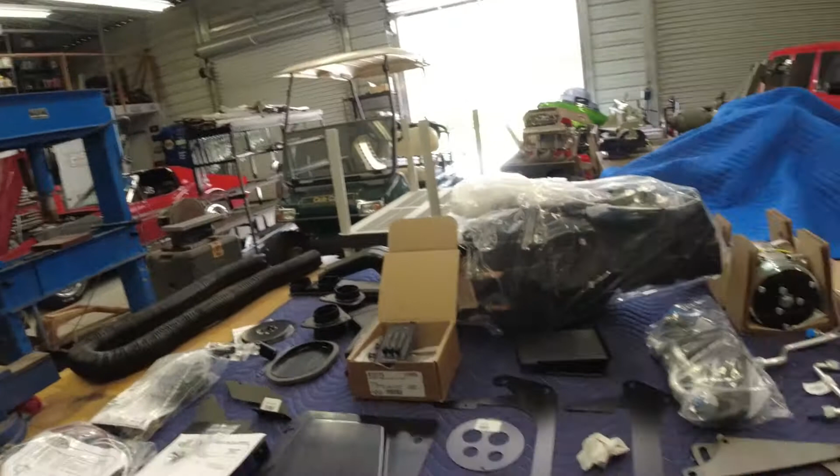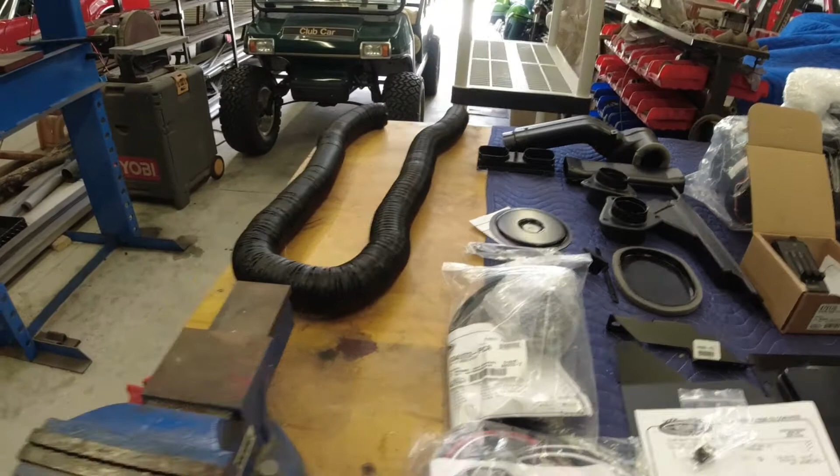But for now, I'm just going to show you a quick overview of all the parts here. It came in 3 separate boxes, and you can see there's quite a few parts. I'll say one thing for Vintage Air, they do a very good job of labeling everything and explaining everything, so there's no question where everything goes. If you look in each bag, they've got a parts list that tells you what's in each bag.

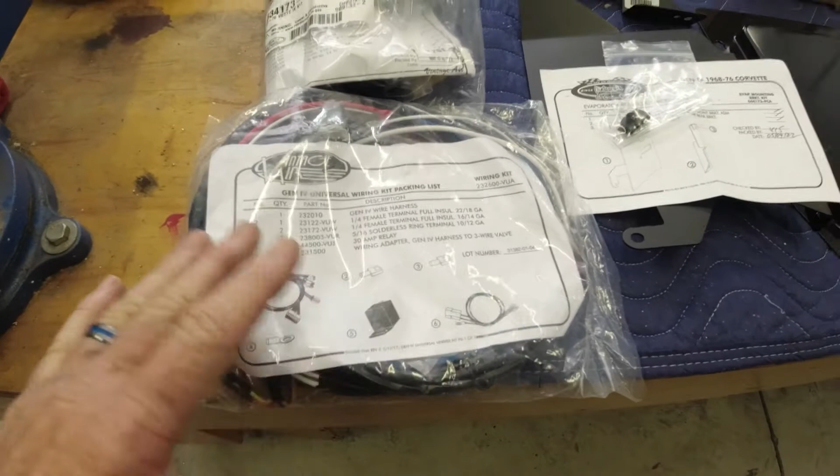This is a universal wiring kit, a Gen 4, that's the order of the Gen 4 unit, and it's for a 68 to 76 Corvette. You can see there's relays and wire loom and everything already in here. There's a little bag that says miscellaneous parts. So they got everything pretty much labeled.

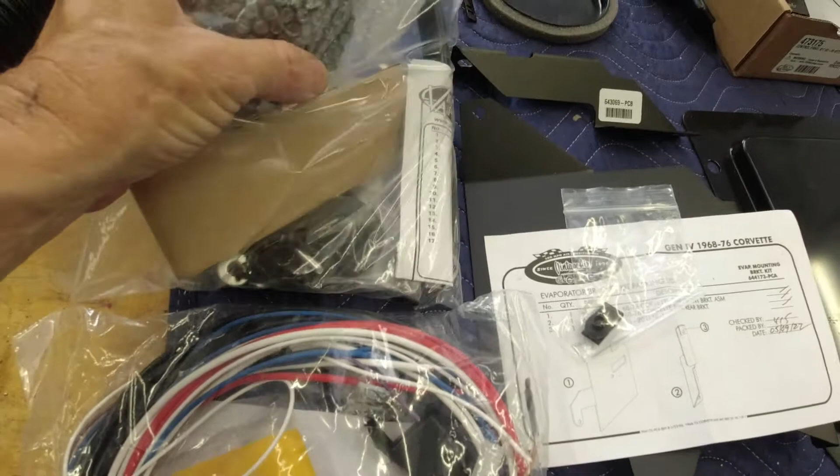Here's some hoses. I think that's the drain hose for the condensation out of the evaporator in the dash, so it drains out under the car, not on your floorboard. And then there's a switch in here for the heater core, which turns the hot water flow off and on in the heater core.

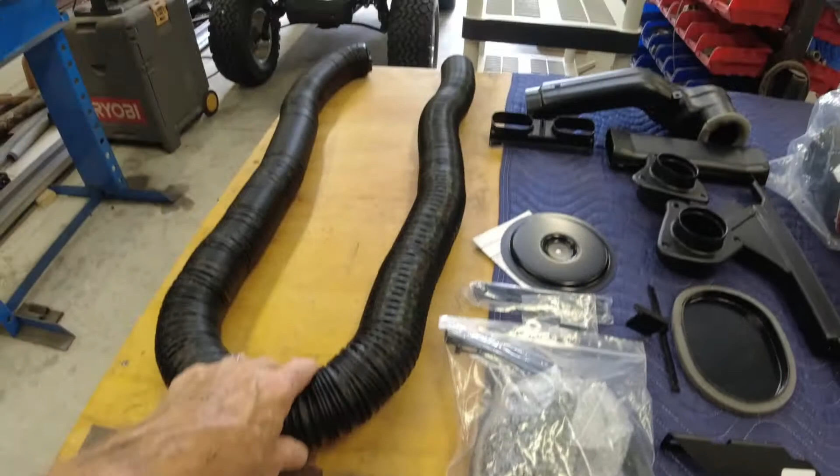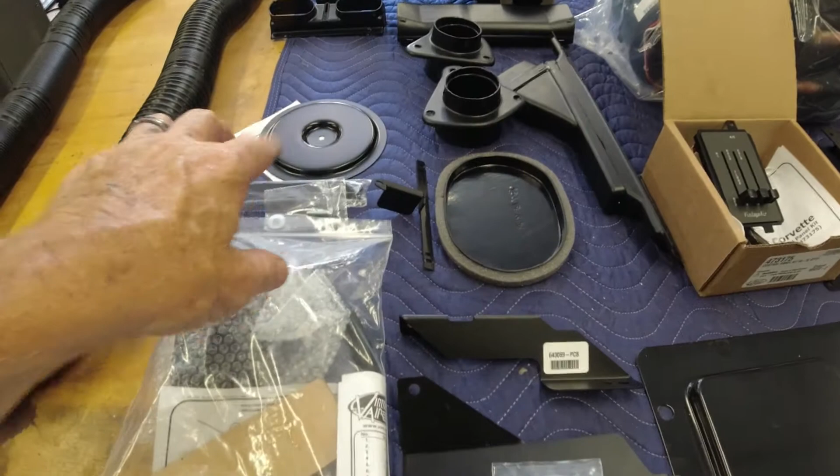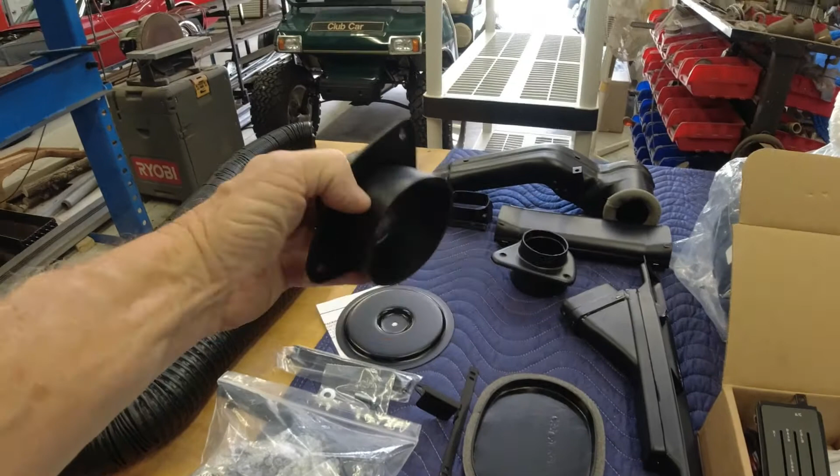You've got a hose here, I think it's like 10 foot long, but you have to cut it into certain sections. They give you the lengths to cut it to for all the different ductwork, and they give you new ductwork in the plastic parts that hook that hose to it, because the factory ductwork won't work with this system. Even the little round louver balls underneath the dash on each side, these parts go in place of those on the back, and the hose hooks into it, and this holds it on there.

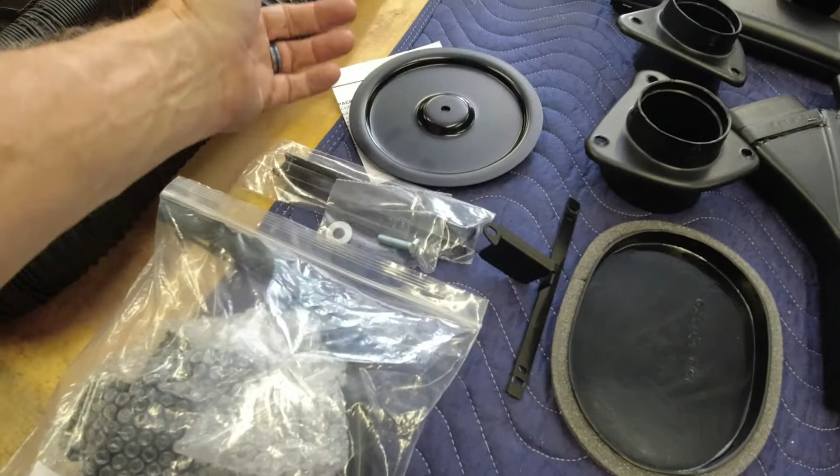I had to make a plate for my blower motor hole in the firewall when I got the car done, because I wanted to drive it. I didn't want a hole there, so I fabricated a plate and put a lip on it, made out of aluminum, and it works okay. But I think I'm going to take it out and put in this one they supply - it's a steel one with a back piece that holds it in the hole, and you're supposed to put silicone around it when you put it in. It fits good and everything, so I'm probably going to take that out and replace that.

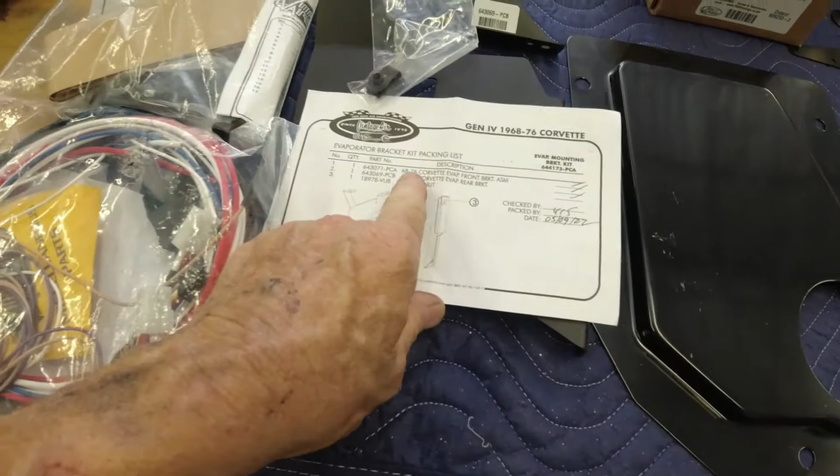Different brackets here, and again, it comes with packing lists in each bag. All this stuff was in separate bags like this - I took it out just so it's easier to see.

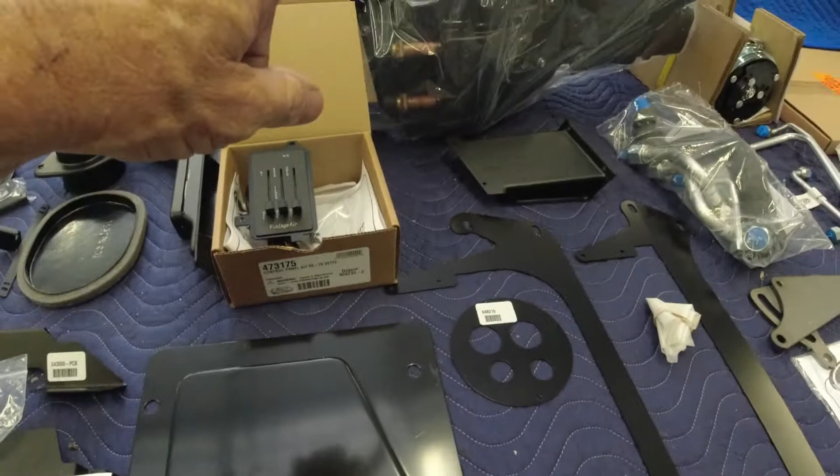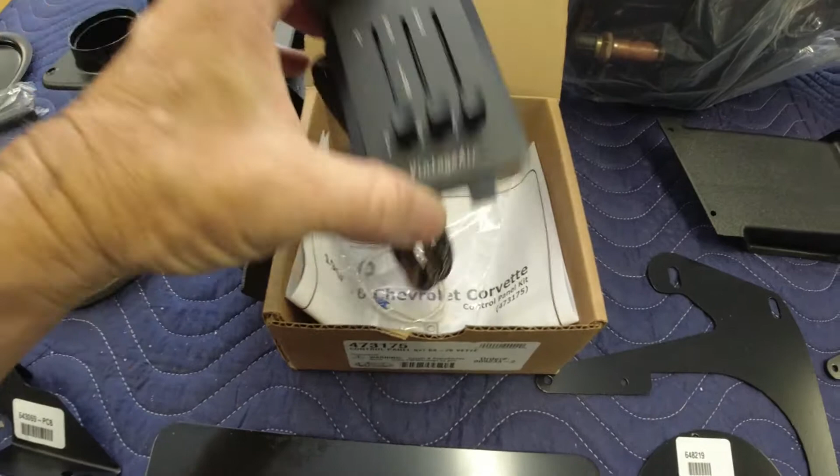This plate goes in the firewall between the air box and the firewall. You can use this with your factory controls, but I went ahead and got one with the Vintage Air controls, and this is going to fit perfect in place of where the old controls were, and it's going to be all brand new. It's going to be a lot simpler to operate instead of those turn wheels on the factory ones. I think it's going to look just fine. And then of course you get the air box here.

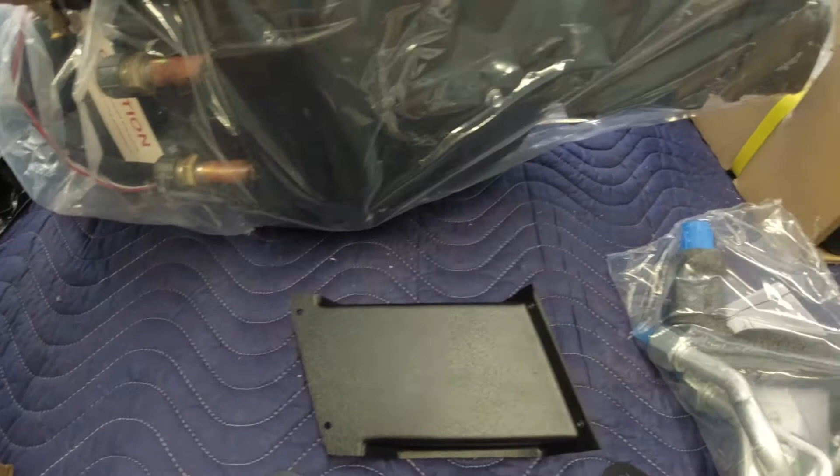It's pretty much self-contained. There's nothing really sticking out on the firewall side like the old original unit did. There was a big box on the outside, I think, where the heater core was, the blower motor and all that. Everything's self-contained, and it's all under the dash. It's a really nice unit.

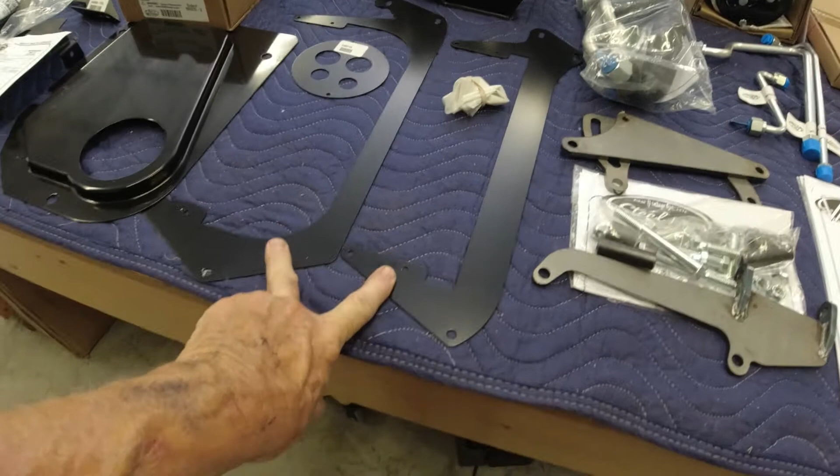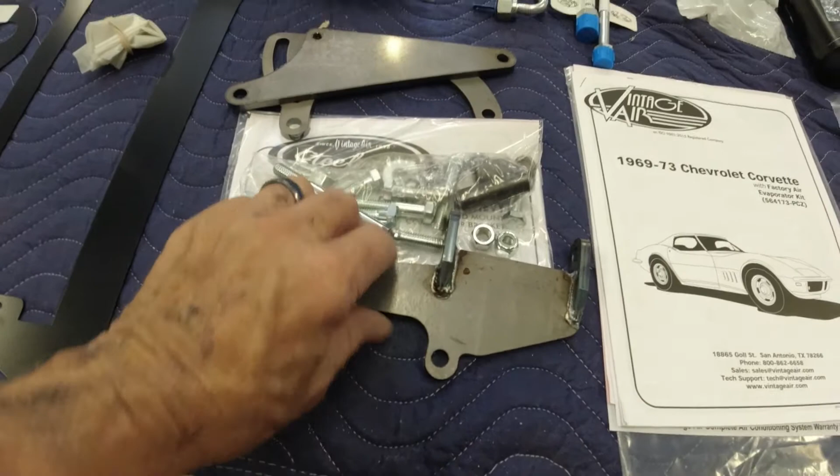These are brackets to hold the condenser in, I believe. And then for some reason, there's some hard lines in here, and these are in a bag. These were just loose in the box. I don't know why it's separate that way, but they had it separate. And then this was in a box by itself, the brackets that hold the compressor onto the motor.

The compressor came in a box by itself. It's got the oil in it already, but of course you have to add Freon. It comes with a very good instruction manual. It breaks everything down for you.

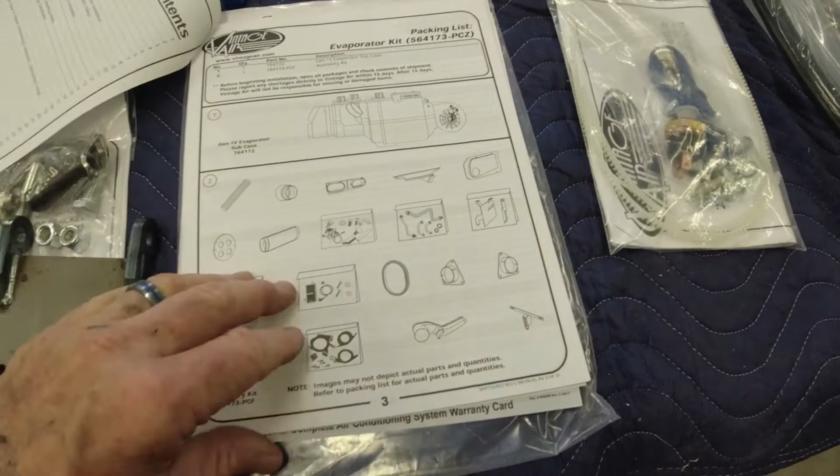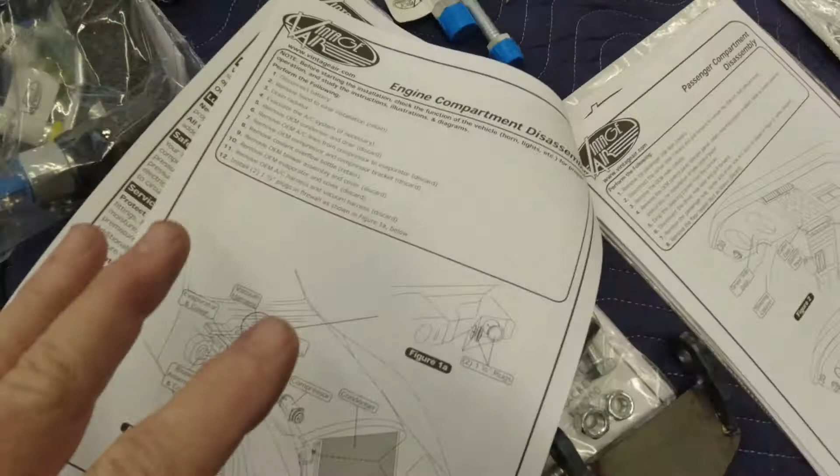It explains your wiring, and it's very well laid out. I mean, it's step by step. As long as you follow these steps, everything should fit together fine, and you shouldn't have any issues. They did an awesome job with their instruction sheet, and it explains little things.

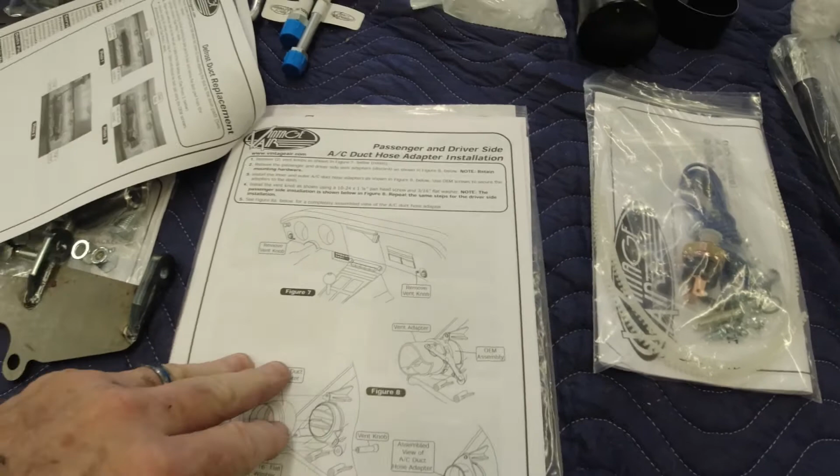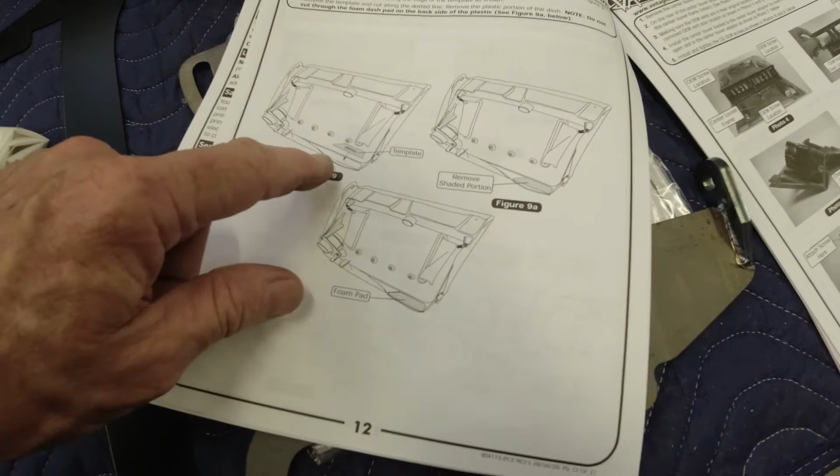You got to do a little modifying on the firewall. You got to cut a little section out and drill a couple holes. And then on the back panel of the passenger side dash, you've got to peel back the vinyl, and you get a little template in the book here you got to cut out, stick it on there, and you got to cut just a little section of the hard plastic out, and then you can fold this and glue the vinyl back up on the back.

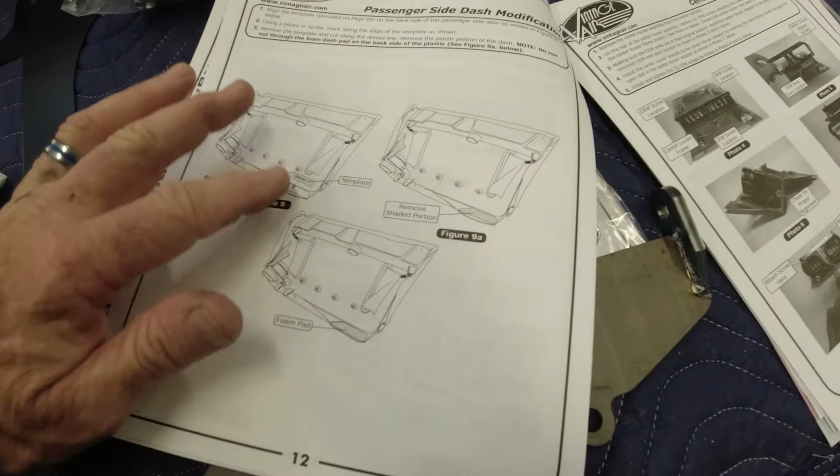So from the front, you'll never know it's been modified, but it must have something to do with clearing the air box or something a little bit. But anyway, they give you all the templates you need.

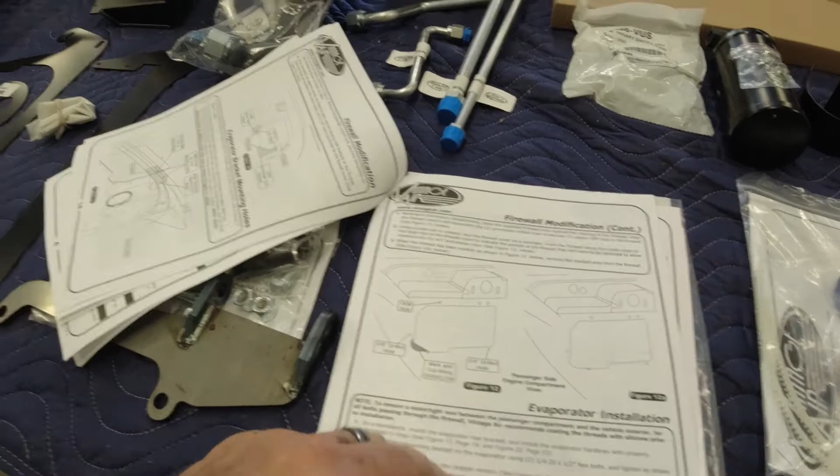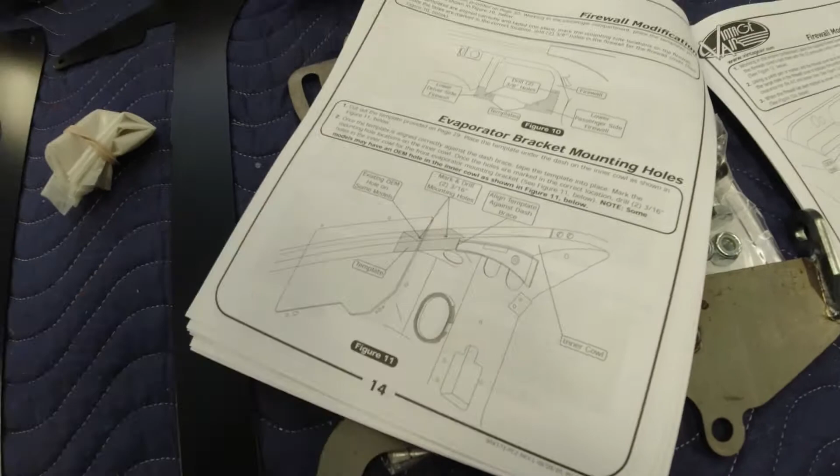Here's some other ones where you gotta drill a couple holes, and then there's another one where you got to cut a notch out under here. There's a template here for drilling a couple holes up under the dash. So I mean, they're really well laid out, explain everything to you, exactly what to do, exactly where every part goes, so there's no question when you get this thing done, it should be perfect.

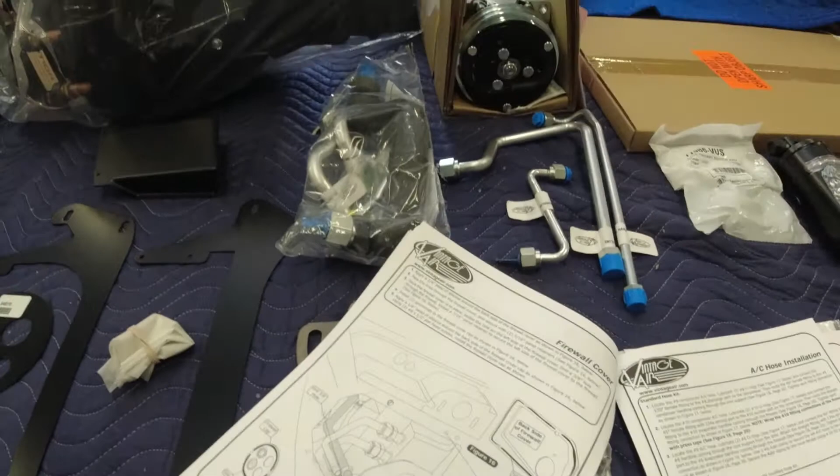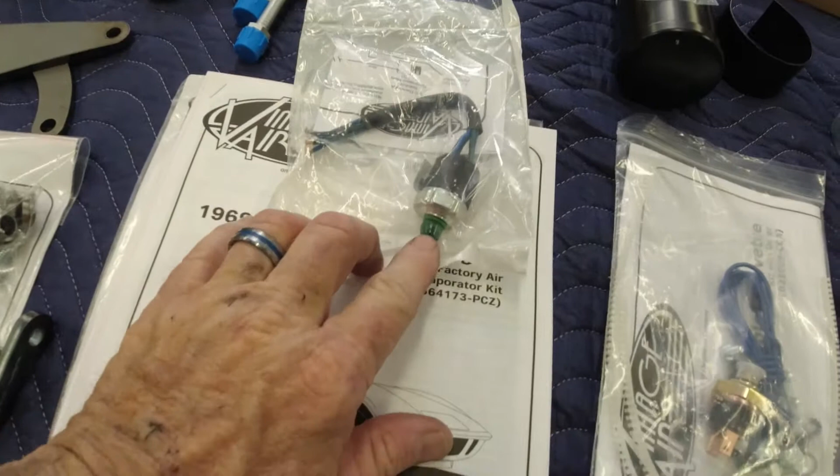Now, the only thing I had to buy extra that doesn't come with the kit is this, it's a trinary switch, and it hooks into your high pressure side, I believe. I'm not sure, I'll have to look in the instructions, but you need that if you're going to run an electric fan. It's my understanding, use a binary if you're just running a single fan, use a trinary if you're running dual fans.

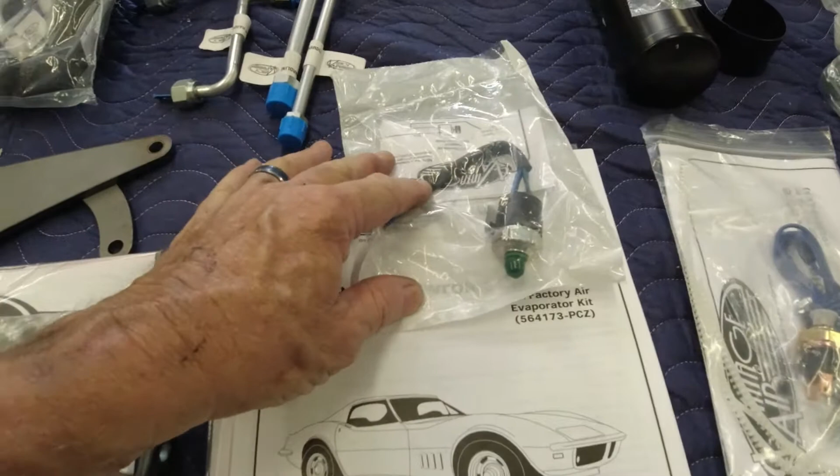And my plan was to run dual electric fans on this car. I've already bought the fans, I bought an aluminum radiator. I didn't put any of that in the car yet. I left the factory stock fan with the clutch on it in there, and the stock radiator, because it's brand new. Whoever had the car before me bought a new reproduction one, so it works just fine.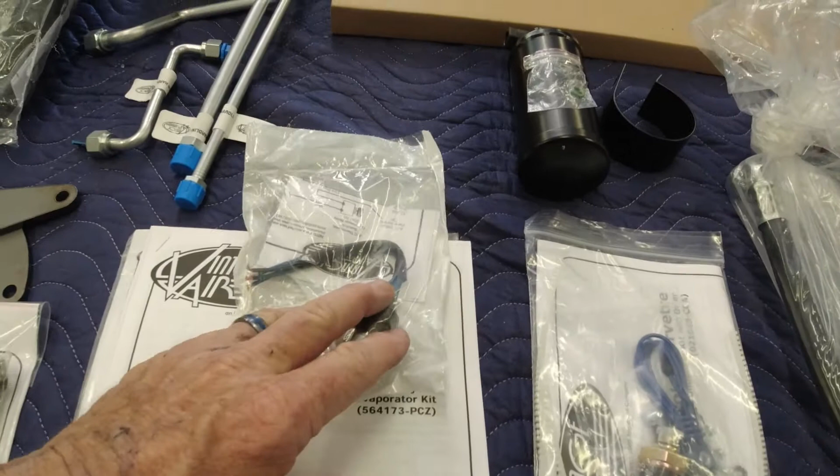I will go ahead and put this trinary switch in the system, even if I don't hook up the electric fans for now, because if you don't have it in there, when you go to put it in, you gotta bleed all your Freon out to put this in. So I'm going to put it in there, that way I don't have to worry about it ever again. And whenever I do decide to, if I decide to, I can hook up the fans without any problems.

This is the switch that came with it. I think that's just a binary switch, because it's only got 2 terminals on it, so it won't work for 2 fans. You might be able to rig it up somehow, but I didn't want to do that.

You got the dryer, got the condenser here. I haven't even opened this box yet. I'm hoping it's okay. And then here's the soft hoses that hook from, I think, the condenser to the compressor. So it's pretty well laid out.

I'm kind of anxious to get started on it, but like I said, it's going to be quite a bit of work to put in. Take your time, do it all right, fit everything, and I got to take part of the dash back out again, and I hate taking that dash out.

I don't even want to think about it. I was hoping I'd get by without taking the driver's side dash out. I'm hoping I get up underneath there and get to the bolts that hold that round vent plate in place and do that. I think if I can do that, I won't have to take the driver's side out. I'm hoping. There's a lot of wires in that, and it's a pain getting in and out. You gotta drop the steering column and everything. So we'll see. If I have to, I have to.